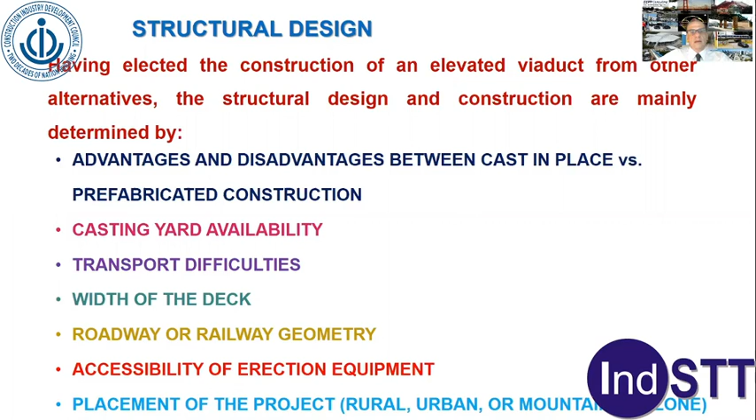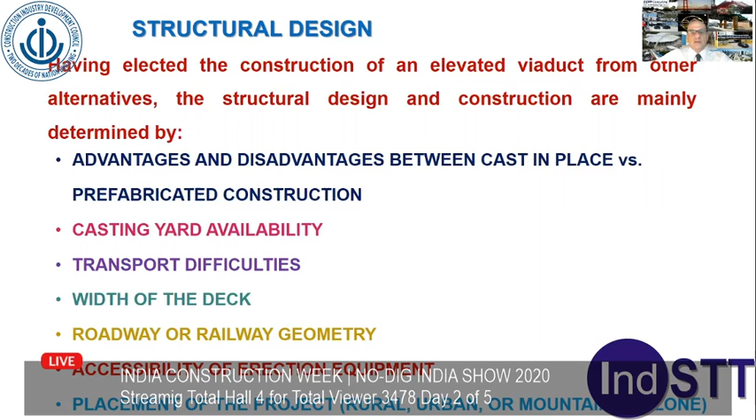Structural design. Having elected the construction of an elevated viaduct from other alternatives, the structural design and construction are mainly determined by advantages and disadvantages between casting in place versus prefabricated construction, casting yard availability, transport difficulties, width of the deck, roadway or railway geometry, accessibility of erection equipment, and placement of the project in rural, urban, or mountainous zones.

Piers and foundations. Piers, in general, rectangular or circular RC concrete columns, bents, RC or PT concrete caps, and two or more columns. Shallow foundations or group of piles, closed or open abutments.

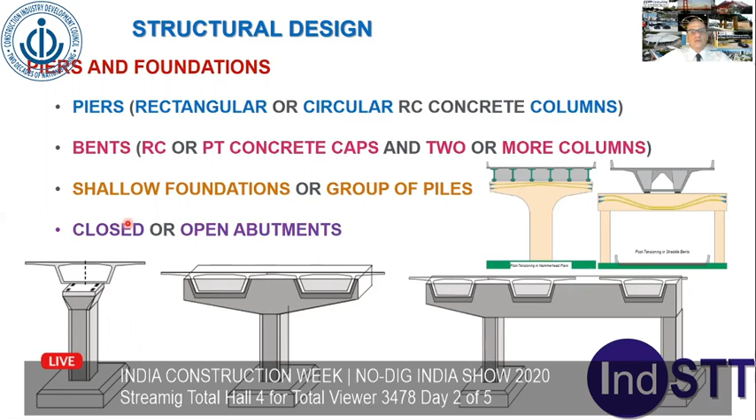Decks, construction method: between 30 meters up to 50 meters span length, precast systems; and between 70 meters up to 300 meters, casting in place methods. Static systems, continuous or simply supported. Main erection systems: full span, span by span, balanced cantilever, incremental launching, and progressive placement.

Main cross sections: U-girders, box girders, multiple I or U beams, plus cast in place or prefabricated deck slabs. Section depth: constant between 30 meters up to 60 meters span length, and variable between 70 meters up to 300 meters.

Erection equipment: launching gantries, cranes, movable scaffolding, lifting frames, form travelers, and launching jacks.

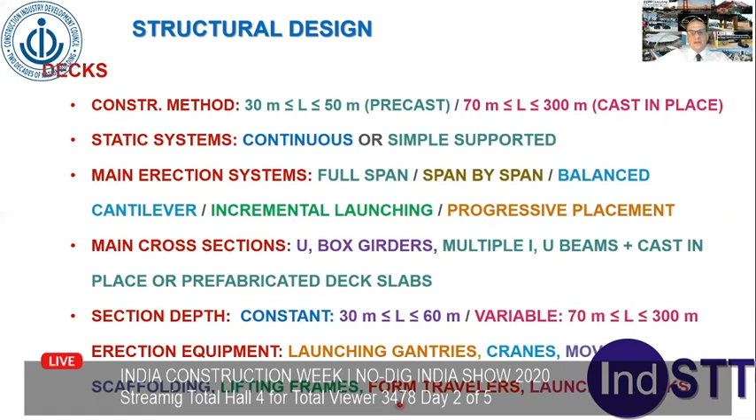Precast systems: segmental span by span and balanced cantilever by launching gantries, lifting frames, or cranes. Full span by launching gantries. Incremental launching by launching jacks and steel noses. U or I beams by girder shifters. And cast-in-place systems: segmental balanced cantilever by form travelers, and full span by movable scaffolding.

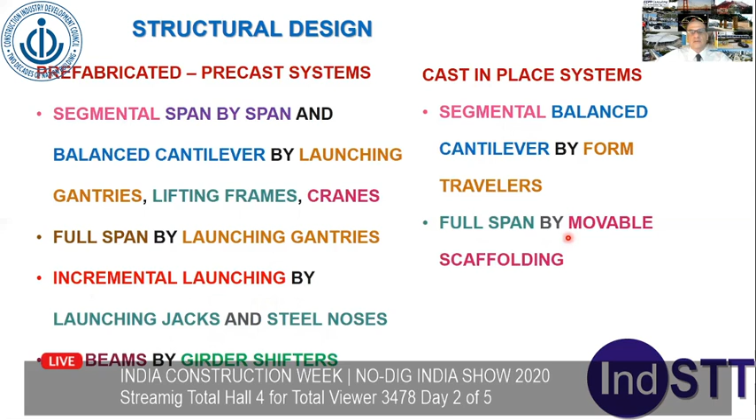Economical span length ranges for concrete bridges. Slab or T up to 20 meters span length. Girders between 20 meters up to 50 meters. Incremental launching between 30 meters up to 60 meters. Span by span system between 30 meters up to 50 meters. Balanced cantilever precast system between 40 meters up to 110 meters. And cast in place system between 70 meters up to 300 meters.

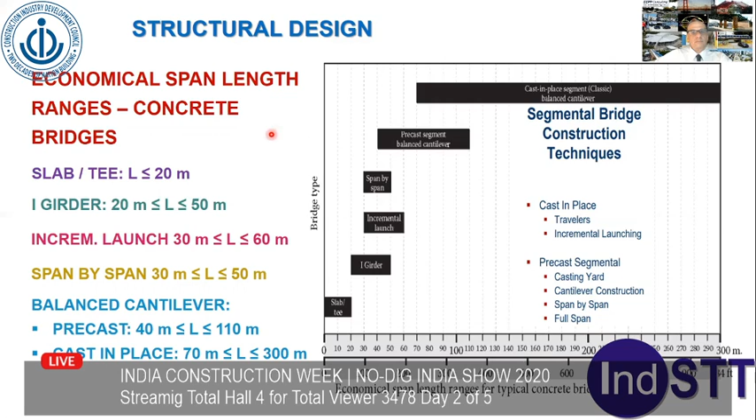Composite action: single or double composite action. Less usual cross sections: multicellular concrete box girders, all of this when the width of the bridge needs to be high. PT concrete box girder with corrugated or truss steel webs: concrete upper slab, concrete bottom slab, and webs with corrugated steel or trusses.

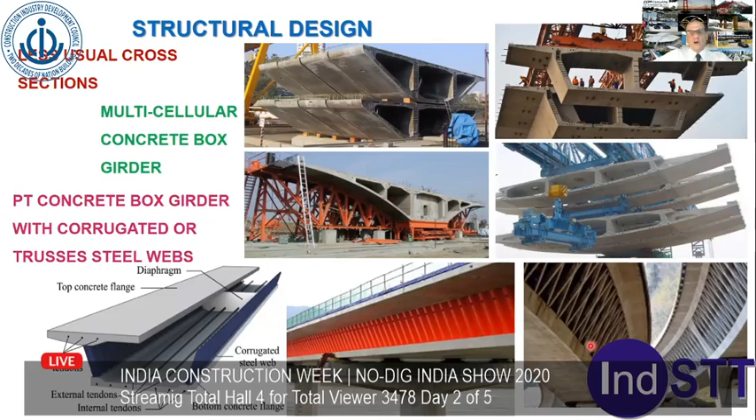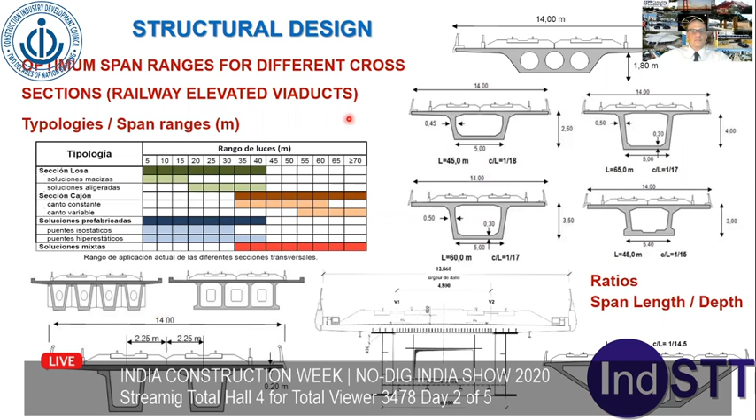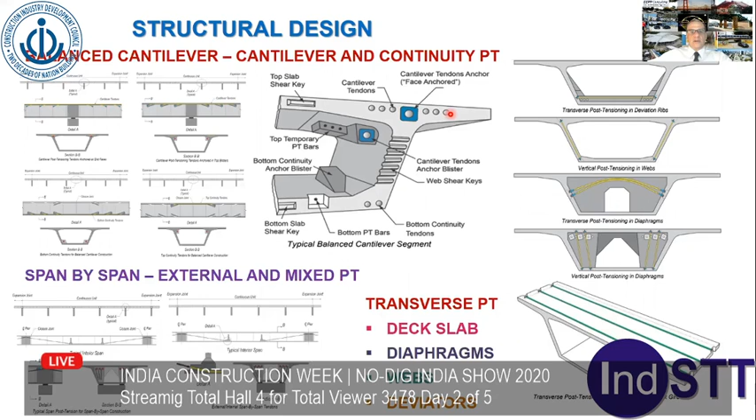Span by span with external or mixed PT. Mixed PT, external PT, for simple support or continuous systems. And then transverse PT in deck slabs, diaphragms, webs, and deviators. These are the main construction details for balanced cantilever and span by span systems.

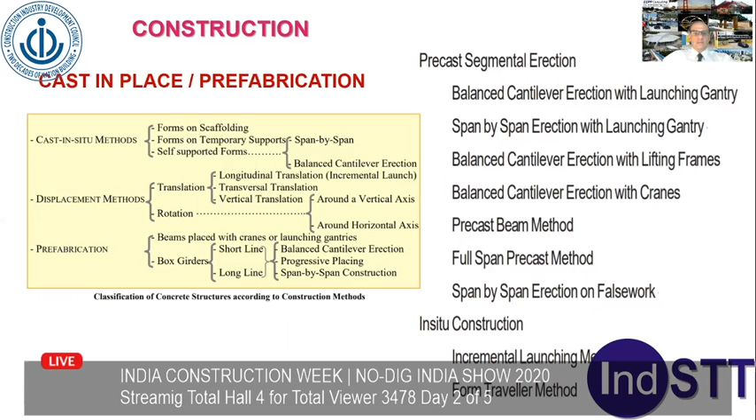Precast segments, launching gantry. Span by span with launching gantries, span length between 30 meters up to 50 meters. Balanced cantilever with launching gantries: segments, balanced cantilever, launching gantry, span length between 40 meters up to 110 meters.

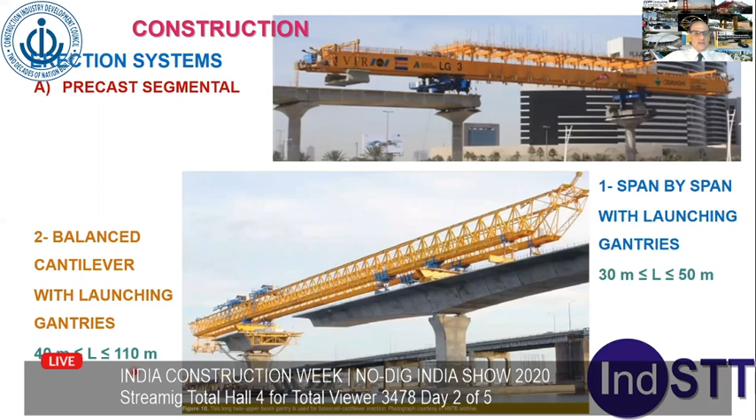Incremental launching between launching jacks and steel nose, span length between 30 meters up to 60 meters. And progressive placement of segments with cable stay system or temporary piers. All of them are segmental systems.

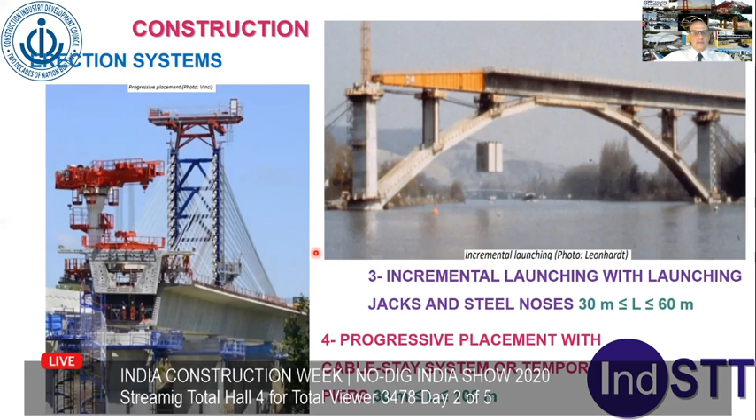Precast full span with launching gantries, span length between 20 meters up to 50 meters, using U-girders or box girders.

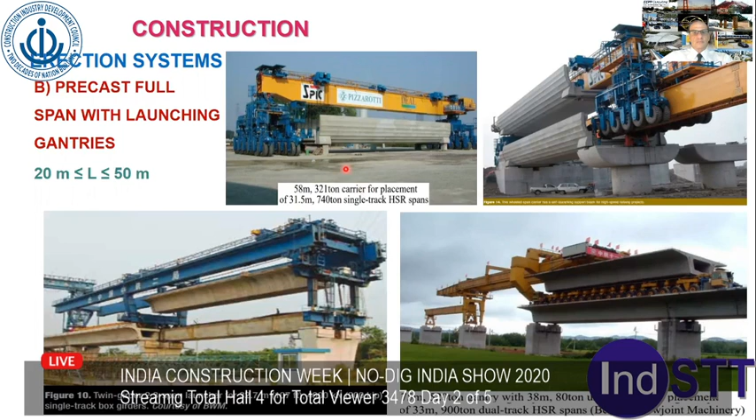Cast in place segmental with form travelers, usually used in the balanced cantilever method, between 70 meters up to 300 meters span length.

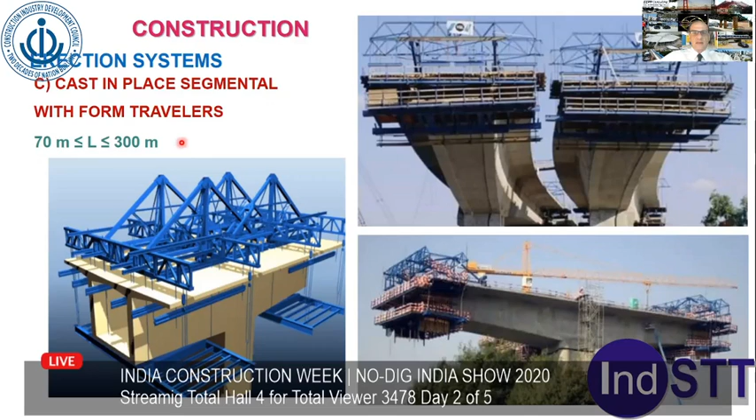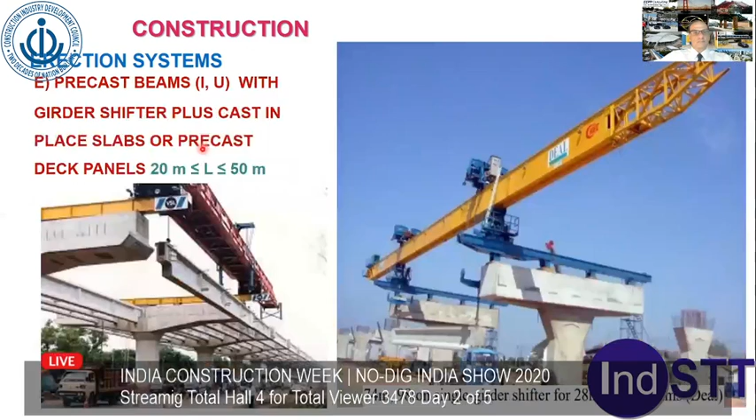Single beams, precast single beams, I and U, with girder shifter - the girder, and then cast in place slabs or precast deck panels, between 20 meters up to 50 meters span length. This girder can shift the beams.

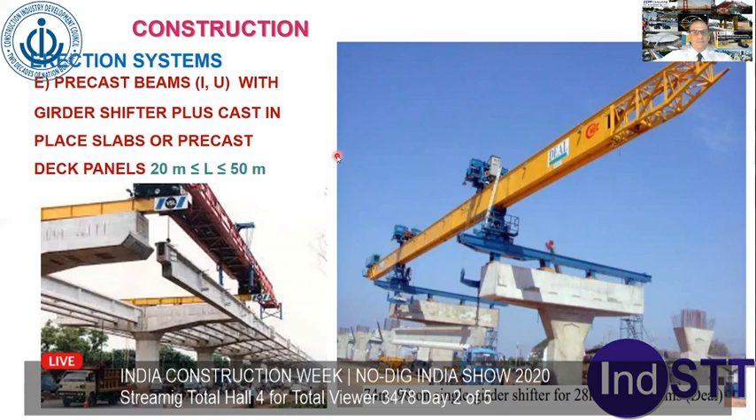Construction cycles, main erection methods. It is very important to estimate the construction cycle of a single span in order to determine the needs of the storage yard, precast construction buildings, and number of molds.

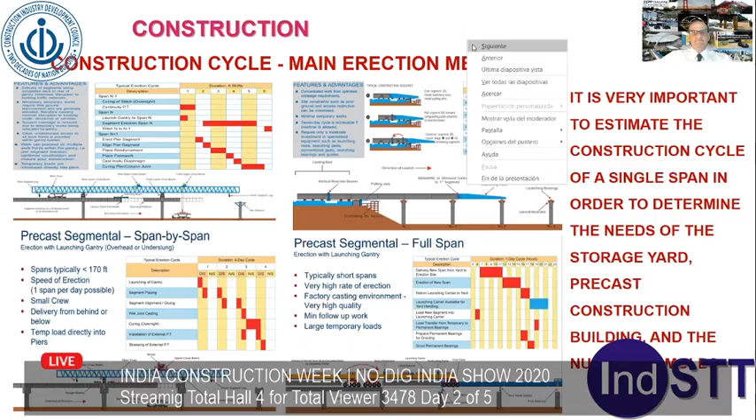Construction facilities and equipment: precasting yard, segment transporter between the precasting yard to the bridge, to the placement of the bridge, precast construction building, segment and molds, and lifting frames to transport segments into the precasting yard. All of these are construction facilities and equipment.

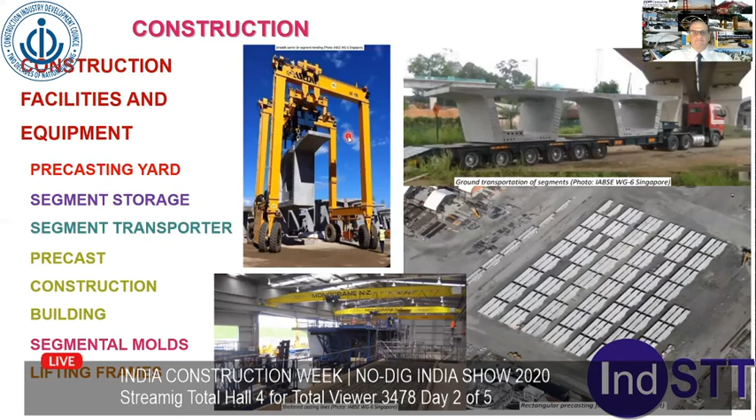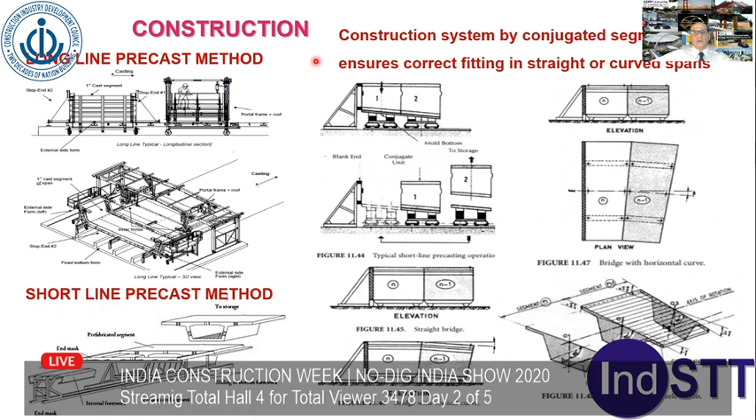Full span molds, U section, and box girder section. Long line and short line precast method. Construction system by conjugated segments that ensure correct fitting in straight or curved spans during the erection.

Accelerated bridge construction is based on prefabricated bridge elements and systems, allowing easy transport and fast erection. It improves in-place construction, total construction time, and public security, and reduces traffic perturbation, in-place construction time, and climatic issues. This method, in my opinion, is very important for the post-COVID era.

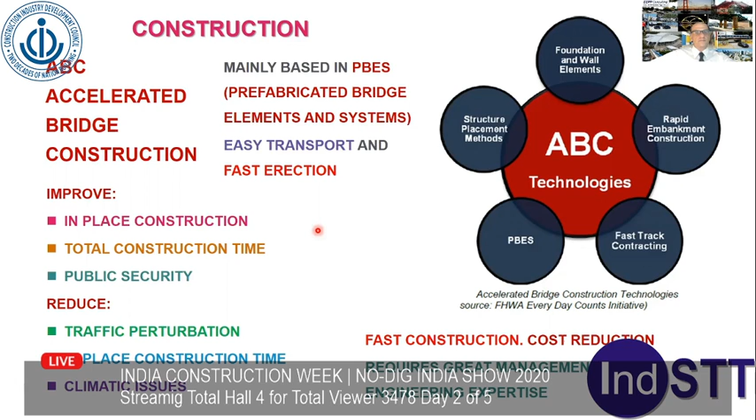Prefabricate foundations, prefabricate columns, prefabricate segmental columns, bent caps, walls for abutments, caps for abutments, and in-place connections. All of these are prefabricated bridge elements that should be connected in place.

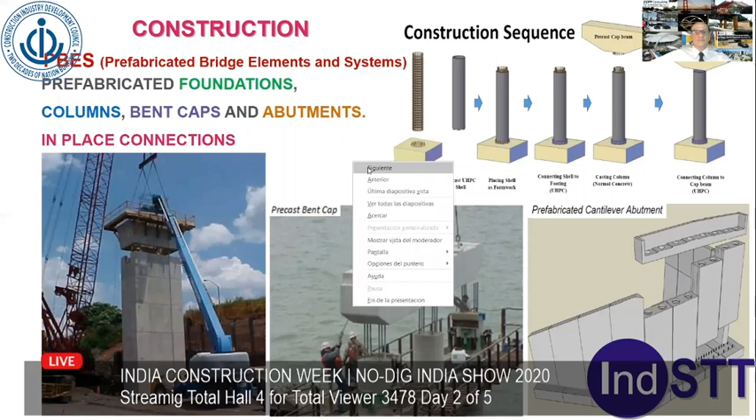Seismic PBES connections, energy dissipating connections, ultra high performance concrete, superelastic shape memory alloy, and self-centered columns in order to achieve the performance-based damage states.

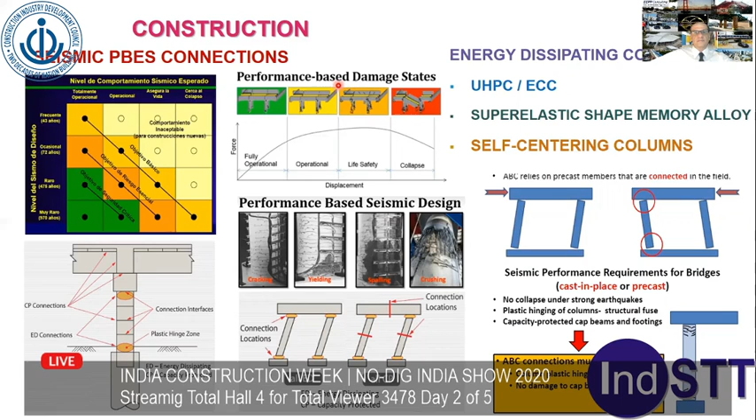In-place connections: mechanical bar connectors, grout ducts, pocket connections, socket connections, and two-stage integral pier cap. All of these are in-place connections of the PBES.

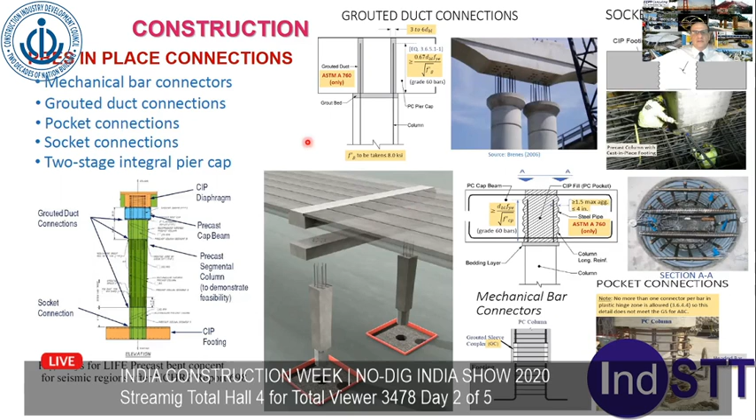And finally, precast decks: full or partial depth concrete panels connected to PT concrete or steel beams.

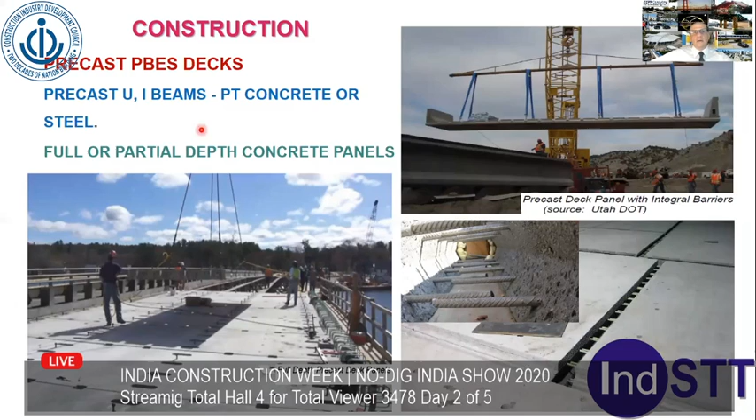Now I want to show you two viaducts constructed in Buenos Aires. The first one is called Mitre. It is a 4-kilometer length viaduct. The erection system was span by span. It's a railway viaduct. The section is a concrete box girder with external and mixed PT.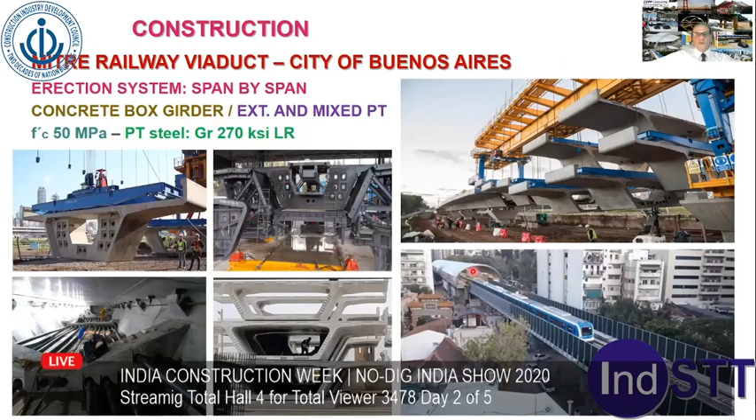The second one is a 5-kilometer viaduct in Buenos Aires too. It's a railway viaduct too, called San Martin. In this case, the erection system was full span. It is a concrete box girder with internal PT.

Here you can see the self-launching gantry and the self-propelled transporter. And this is the construction finished.

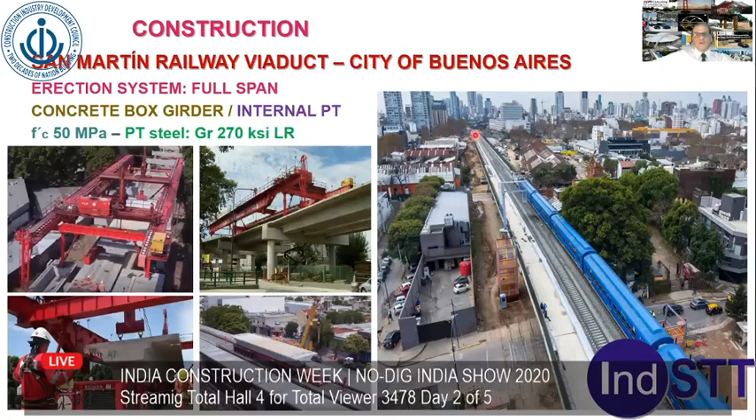Improving construction practices, processes, and guidelines in the post-COVID world. Conclusions and opinions: new bridge and viaduct constructions and retrofitting of existing structures are highly relevant activities in public works all around the world. In many countries, the public work construction industry can quickly help reactivate their economies.

To achieve this objective, the sources of financing through multilateral credit and development banks, fundamentally in developing countries, is a crucial issue.

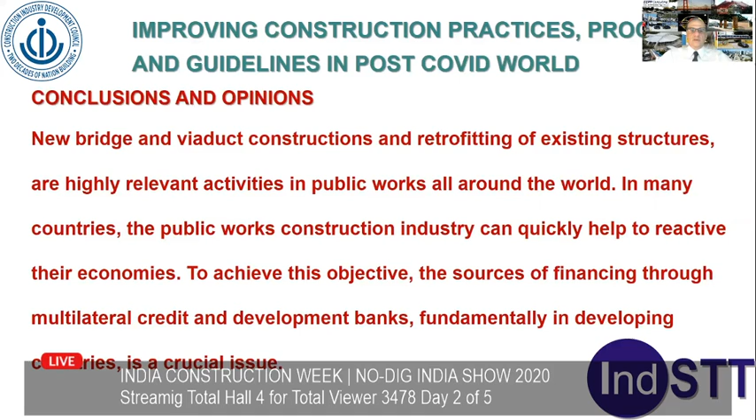These important infrastructure projects employ a large number of people: project, production, and management, architects and engineers, suppliers, construction workers, administrative staff, etc. The ABC method of bridge construction can be a valuable tool in safety and overall care within the construction industry.

Prefabrication is prone to further organization, planning, and control of all types of activity related to the industry, and particularly with the mitigation process of this problem.

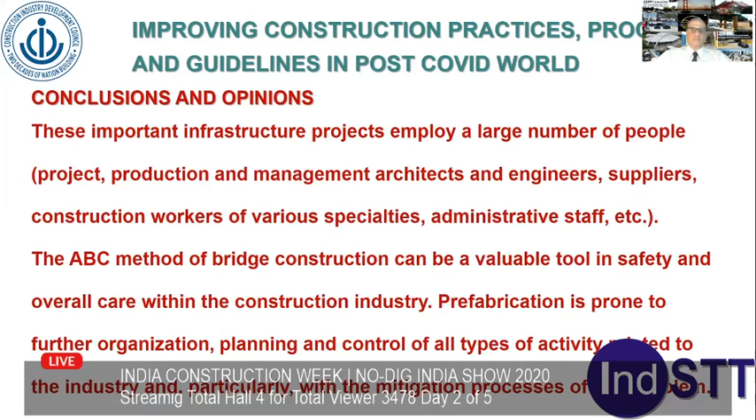In addition, the work in place in systematized processes, basically of transportation and assembly of precast elements, is also prone to being able to comply with the OSHA recommendations.

These systematized construction processes, in general, have greater facility in feasibility and financing analysis along with the compliance of the budget with limited deviations.

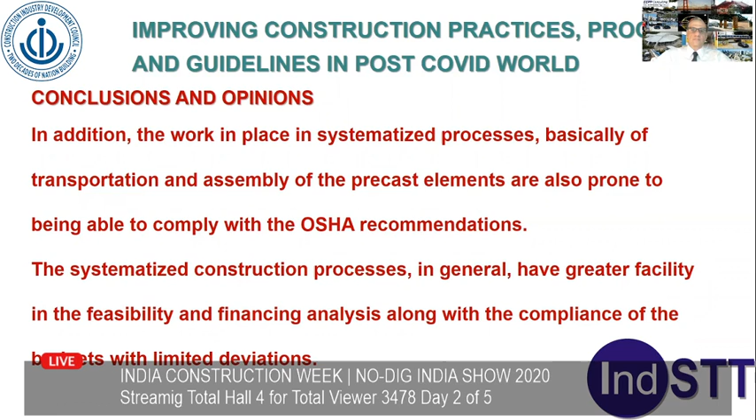This premise can mitigate the great risks and challenges posed by the post-COVID era: maintenance and management of workforces, human resources, financial sources and financial health of construction companies, recovery and stabilization of the supply chain, and improvement of safety and overall care within workplaces.